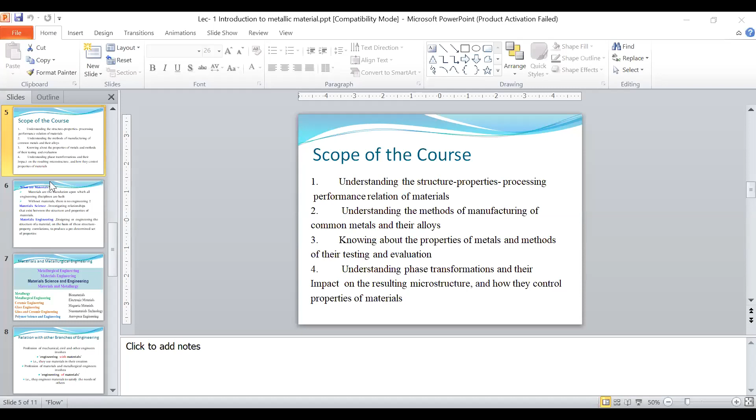So in case of engineering materials, with the title this course holds, you can understand that we will try to cover all the materials that are used for engineering purposes. That is why it is called engineering materials. Now, what are materials? Materials are everything in engineering discipline. If we want to build any sort of engineering structure, we have to use some materials. And material science is covering all these properties.

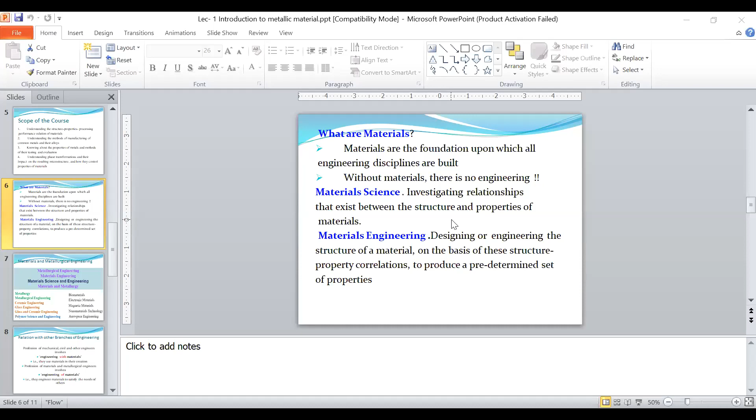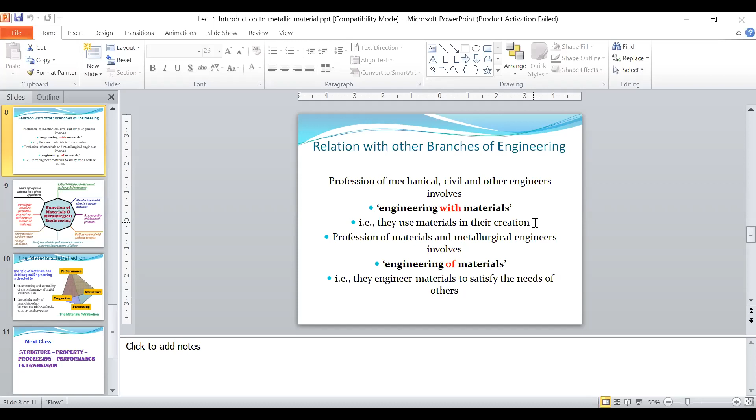So given the next slide, okay, we'll just pass this one. Quickly have a look at this. So the other engineering branches, what they are doing is engineering with materials. Okay, mechanical, civil, other engineers, they are engineering with materials. And what material and metallurgical engineers do, they are doing engineering of materials.

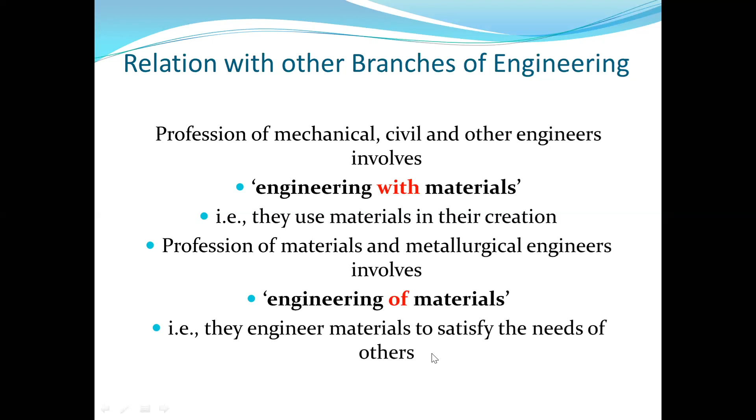Okay, suppose you are building a big bridge or building or a machine, where you have high temperature. Sometimes you may have to have a material which has to withstand a high pressure. So the existing materials that you have are not good enough to actually serve your purpose. So you ask the material engineers to give you a new material by making some small structure changes, microstructure changes, so that you can actually place it in the operation. Am I clear? Yes, sir. So they satisfy the needs of other engineers.

Okay, so these are some functions. So how are these things done? Suppose I need a bearing. I have a vehicle where I need to have a bearing, but the current material of the bearing is not actually withstanding the appropriate speed, RPM, and other things. Okay, the more I'm trying, it is always breaking down.

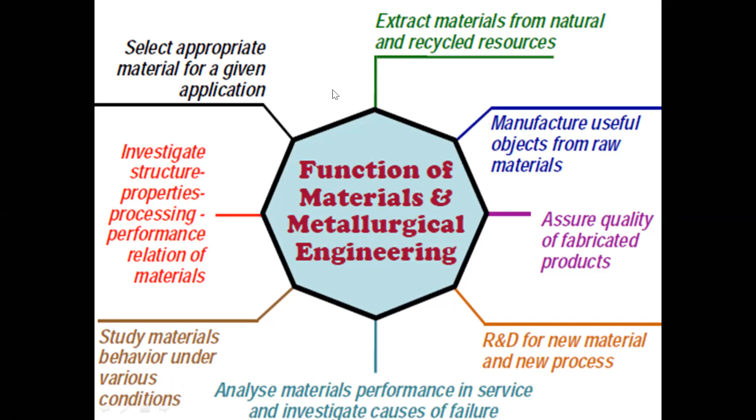Yes, sir. Okay, if so then I will go forward.

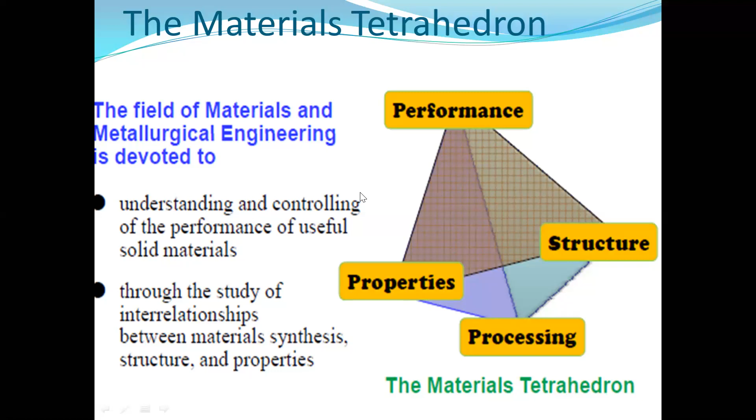So in materials science this thing is very popular, that is the material tetrahedron. These four things we always try to impose, or we always try to, what should I say, focus on these four things. This is performance of a material, property of a material, processing of that material, and the structure of that material. Okay, so understanding and controlling this whole process will actually give us the appropriate material. Okay, so this tetrahedron, these are called tetrahedron. Tetra means four, so tetrahedron has these 4 points that we need to be discussing for new materials.

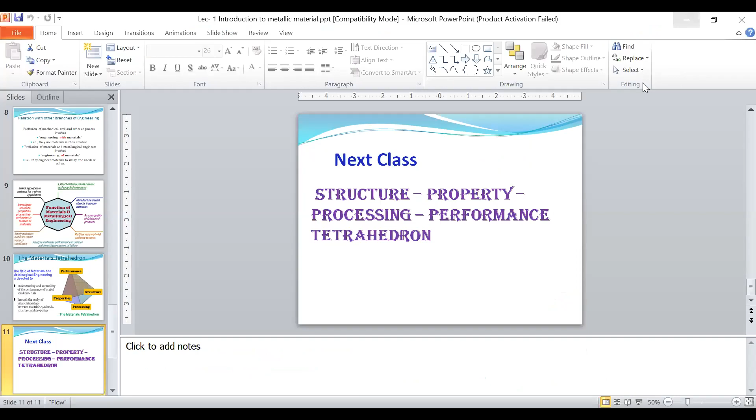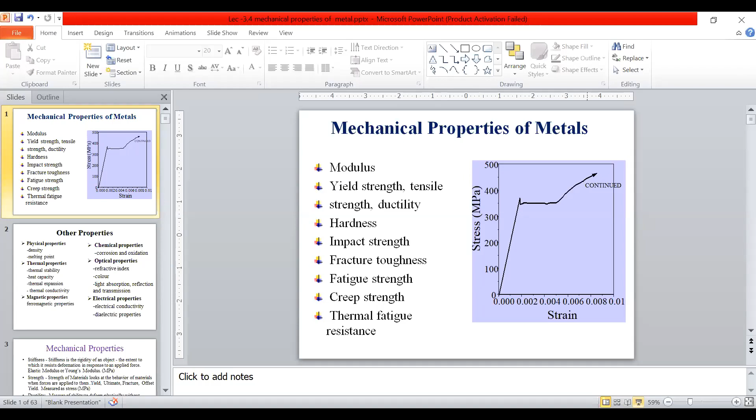Okay, so this was actually the first slide, the introductory slide. Now let's move forward where we had this one. Okay, so now what I will try to discuss is some mechanical properties of metals.

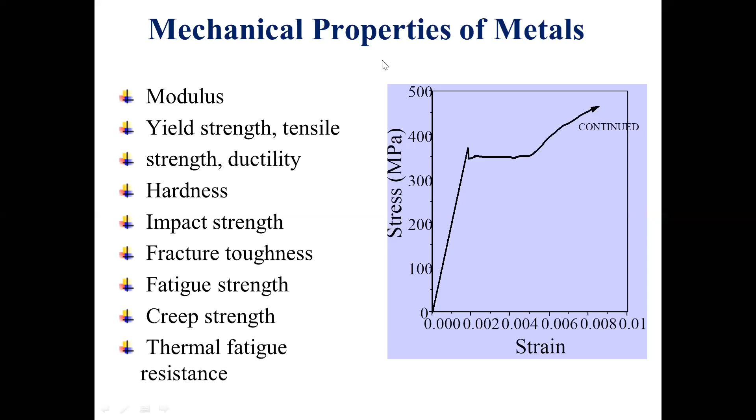Okay, guys, are you with me? Yes, sir. You can always ask questions if you are not understanding any of the points. Okay, all of these were discussed in the first class, as most of you were absent, so I'm just giving a quick review. So if you want me to stop or slow down, please give me a knock or tell me, sir, please slow down. Okay.

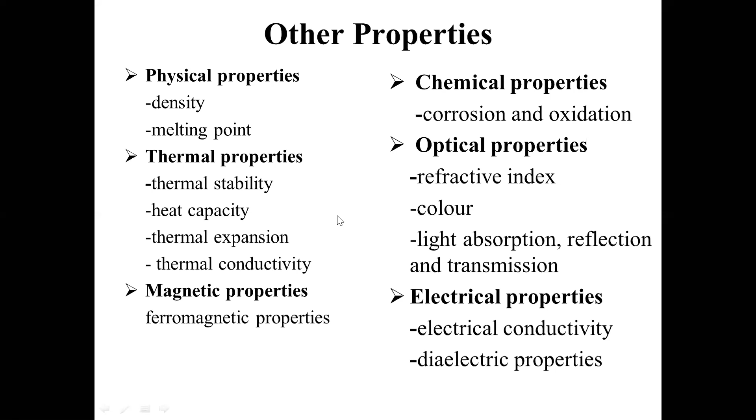So the mechanical properties are there, but the materials also have other properties other than mechanical properties. Some of them are given here: physical, thermal, magnetic, chemical, optical, and electrical properties. Have a look, just know the names. Okay, already you know most of this. Some properties you may not know, but those are not that important right now. We are going to focus on the mechanical properties only. Have a look at these properties. I'll give you a minute just to have a look and try to understand by yourself. Okay, I think I can go forward.

So let's start with mechanical properties. First one is stiffness. So what is stiffness? Stiffness is the rigidity of an object. Okay, stiffness is the rigidity. Sometimes while we talk in English, we also use this word stiff. Okay, so stiff means rigidity. You cannot move. You cannot change, you cannot deform.

So in case of material, what is stiffness? So if you apply any force, there will be a deformation on that metal or material. In order to stop this deformation, the internal property of any material tries to bring a resistance against that force. Okay, so stiffness is the rigidity of that object while it tries to resist a deformation in response to an applied force.

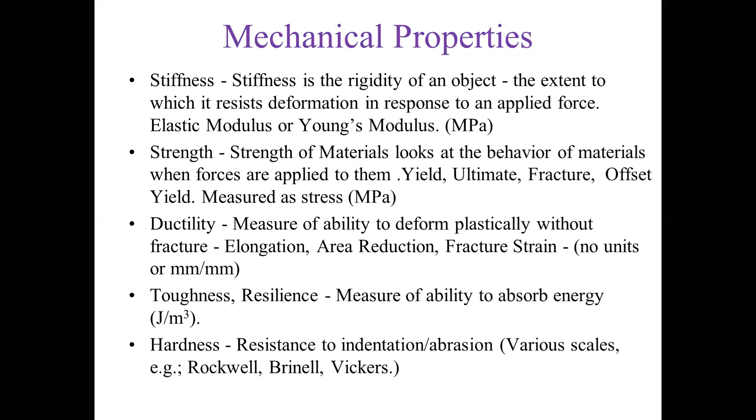We'll come back to it, no problem. For hardness, we have certain hardness testing systems in the engineering materials sessional classes, and also in solid mechanics sessional classes. So we'll come back to hardness, toughness, ductility, everything. Okay, up to now I think these things are clear. Just to show you some pictures so that you can understand how loading is given.

Loading means applying forces. Okay, so tensile force means creating tension, which means you are going to apply force on both sides in an outward way.

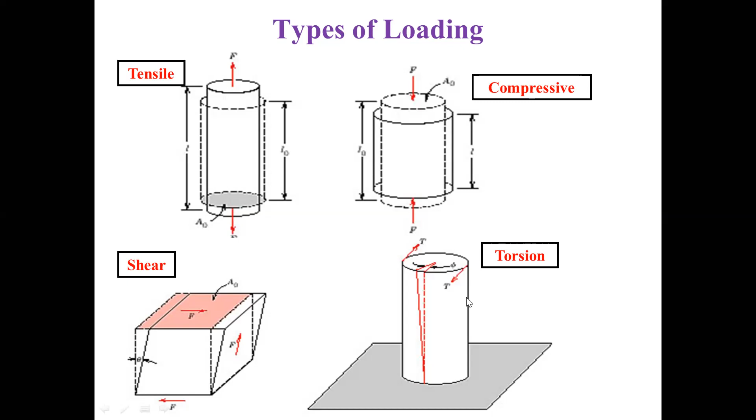Okay. I guess your 40 minutes time is up, so I am going to conclude and finish my class today right here. So from tomorrow or the next class, we'll go inside stress strain and its diagram and how these stress strain are going to dictate most of our mechanical properties of any material.